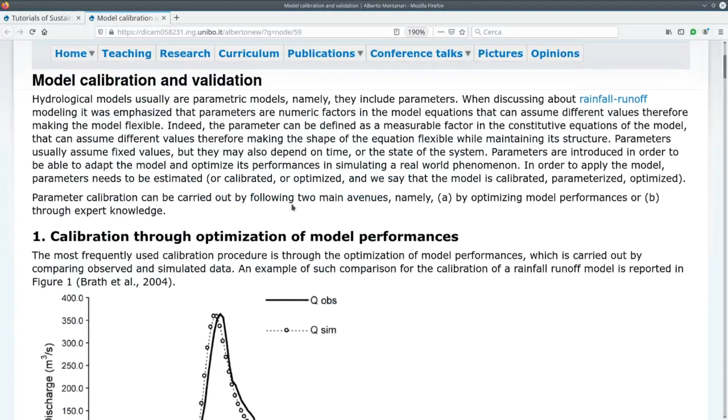This is the page of our course, and we are at model calibration and validation. I want to go back here because we already discussed model calibration, but I want to discuss now model validation, which is a different story. Let me pass to the other view, which is larger. Just 1 second. Here it is. Okay, good. So, as I said, we talked about calibration. Now let's talk about validation.

So what is validation? Validation is a way to check model performances. Calibration is a way to optimize the model performances. Validation is a way to check them. Because calibration is of course a very nice way of making the model able to simulate what we observed. On the other hand, calibration has a downside. The downside is that it's a kind of model training, and you train the model against the situation that you used in calibration. So in calibration, you have a given hydrograph, and you train the model to reproduce that hydrograph.

But actually, what you want to use the model for is not the observed situation. You want to use the model for simulating something that you don't know, something that you didn't observe. What you observed is already known, and making the model able to reproduce what is already known is not our target. Our target is to make the model able to reproduce something that we don't know. So, and this is a challenging question, is the model able, after calibration, to reproduce what we call an out of sample situation, an out of calibration sample situation? This is a challenging question.

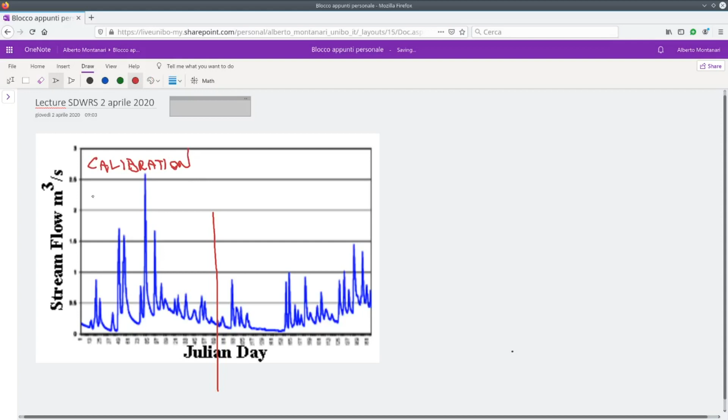So what you see here is an hydrograph, and you could use this hydrograph taken from Wikipedia to calibrate your model. But another possibility is to split the hydrograph into parts. For instance, you can split here, and then you could use this part here for calibration. So you have to forgive my writing, I have to learn. So this could be the set of data that you use in calibration. And then you could use this second set of data for validation.

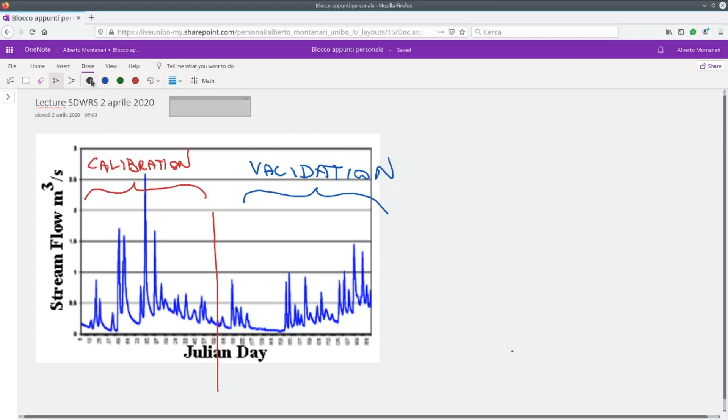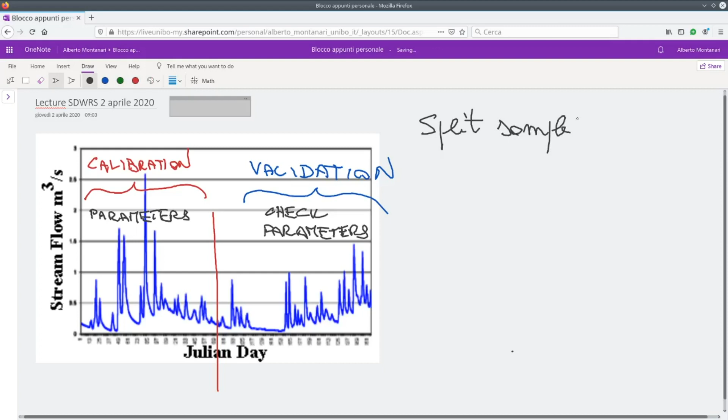Which means that you estimate the parameters here. You get the parameters from here. And then in the second part, you check the parameters. Okay? This is the idea. This is called precisely, in technical terms, split sample validation. This is the split sample validation.

There are some questions here. The first question is, if I use only half of the data to calibrate, the parameters are not calibrated by using the full set of data. So I get a higher uncertainty in the parameters. You may remember that I said that uncertainty in parameters decreases for increasing sample size. The sample is our data set, and the sample size is the number of data. So for increasing sample size, we have uncertainty which is decreasing in the parameters.

And therefore, if I use for calibration a reduced set of data, my uncertainty in the parameters increases. This is true, but we can accept it for the sake of validation. So what we can do is, let's start with half of the data to calibrate the parameters. This is also nice because calibration takes longer if you increase the sample size of the calibration data. So if you reduce the sample size because you split the data, then it's also nice. And then you get a parameter set. Let's assume that this is not the final one, it's temporary, just for the sake of validation.

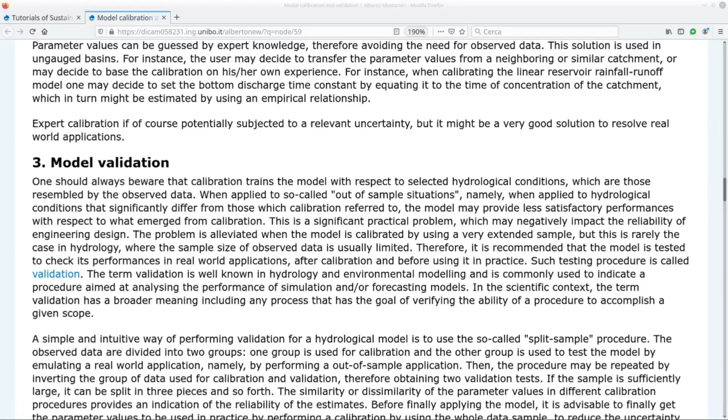I'm not going into the details. This is in a way a question that I may ask at the exam, and you have also the description here. If we go to the web page, I think there is a link here. You see in the bottom. Let me select it. There is a link to a Wikipedia page. And if you open it, you know, this is cross-validation.

It's not called Jackknife here, or maybe it is somewhere. Let me check if the term is somewhere. Not necessarily. Or actually, they make a difference here between cross-validation and Jackknife, because they use the term Jackknife for parameter estimation, not for validation. So, you know, the terminology in different disciplines is somehow different.

What we mean in hydrology with the Jackknife, usually it's the validation, not really the parameter estimation. Even if, you know, they are very similar, because each time that you validate, at each step, you also calibrate. So it's not very different, but the terminology is a little bit different in different disciplines.

But anyway, here you have an example. It says one round of cross-validation involves partitioning a sample of data into complementary subsets, performing the analysis on one subset, called the training set, and validating the analysis on the other subset, called the validation set or testing set. To reduce variability, in most methods, multiple rounds of cross-validation are performed using different partitions, and the validation results are combined, for instance averaged, over the rounds to give an estimate of the model's predictive performance. This is precisely what I meant to say.

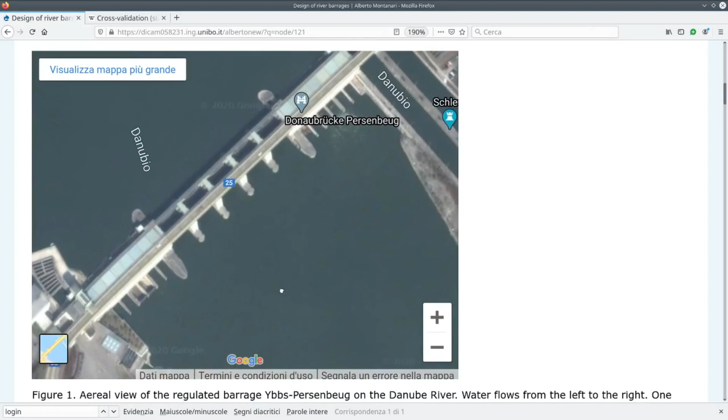We will talk specifically about fixed barrages, unregulated ones in specific, because these are the simpler ones, the ones that a young professional engineer is most frequently asked to design. Here there is a figure which I think I already discussed with you. This is a Google map, and therefore you can enlarge it. It's a barrage on the Danube, conceived for keeping the Danube available for navigation. I already discussed this with you, so I don't want to dedicate more time.

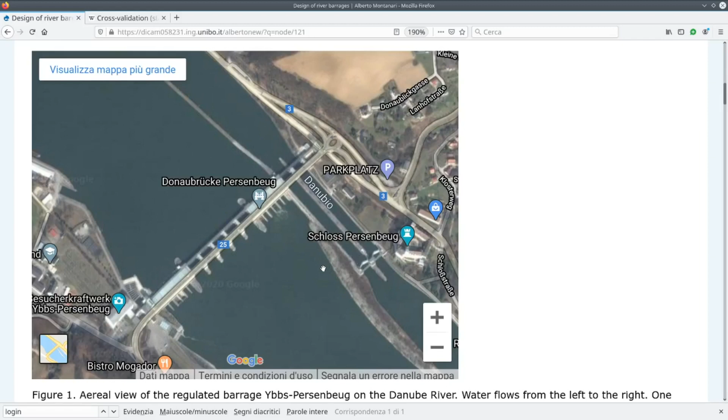I just want to say one thing that I didn't say: it's this purpose of navigating a river that leads to the construction of barrages. Most of the long rivers in Europe, the Rhine River, the Danube, and also the Seine River, are equipped with river barrages in order to make sure that navigation is possible. And in order to pass through them, there are navigation locks. You can see here the navigation lock on the left side of the river. The navigation lock allows boats to get in and out.

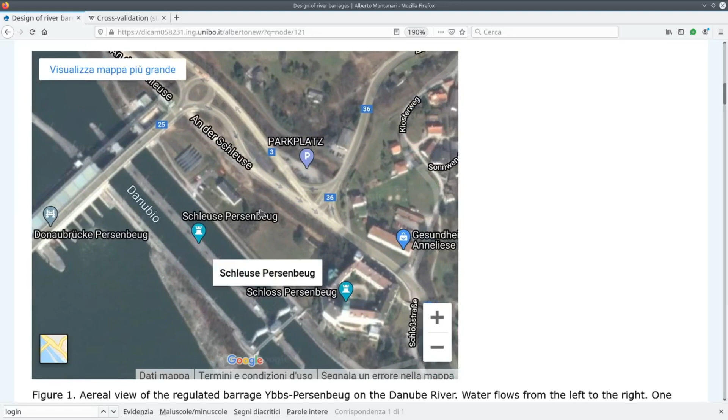Let me see if there is a link. No, I don't think I have a link here of how navigation locks work, but there is a nice figure on Wikipedia. Let me see if I can find it. Just give me one second. I can't find it now. I have it linked in another page, I have to link it here also. Okay, let me just show it to you after the break.

So as I said, most of the European rivers are equipped with barrages in order to ensure navigation. The problem is that these barrages are a concern for environmental impact because they break the river from an ecologic point of view. There is a break between the ecologic system, living organisms in practice, upstream and downstream. And also there is a slowdown of the river flow. The velocity is decreased because you increase the storage in the river, which implies a reduction of the oxygen content of the water, and this causes a decrease of water quality. Again, it's a matter of concern.

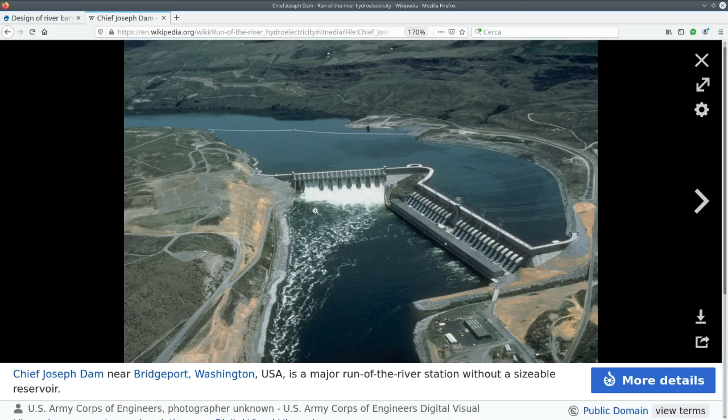And this is an interesting link which you may read. And there is a figure here, for instance. This is a run-of-the-river hydropower plant, which is installed over a dam, but it's the run-of-the-river plant. They are placed in the part of the dam where water naturally flows during the whole year. And they also use the water that is flowing from upstream to downstream, so the water is retained and released just downstream. They use this water flow also to produce hydropower.

Usually hydropower is produced by releasing water much downstream, because the amount of hydropower that you produce, as you may know, is directly proportional to what is called the head of the hydropower plant, or hydraulic head. It's the difference in elevation between the water level upstream and the water level where water is released. So they tend to release water much downstream in order to increase the head. But in some cases, we can also produce hydropower when the water is released immediately downstream. And in this case, we talk of run-of-the-river hydropower plant.

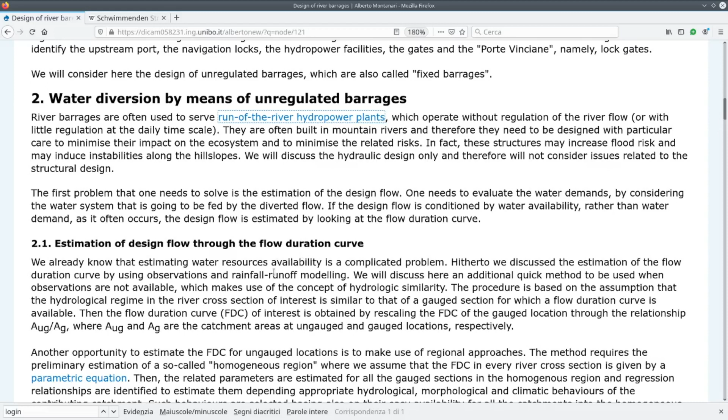And there are other uses for barrages and reservoirs, for instance, flood protection. And even in this case, we need to check whether the uses are conflicting. Okay, so we know how to use the flow duration curve to estimate the design flow of these barrages, because this is our first step. We have to estimate the design flow. And the design flow, we know how it's estimated. It's a cost-benefit analysis, basically. Very often the design flow is close to the Q60, the flow with duration of 60 days. And we already discussed these indexes, so we don't discuss this anymore.

Okay, and now we discuss instead the structure of the unregulated river barrage. Before I start describing these parts of the structure, let me refer to this sketch. This is a typical sketch, and I want to copy it and bring it to the graphic blackboard.

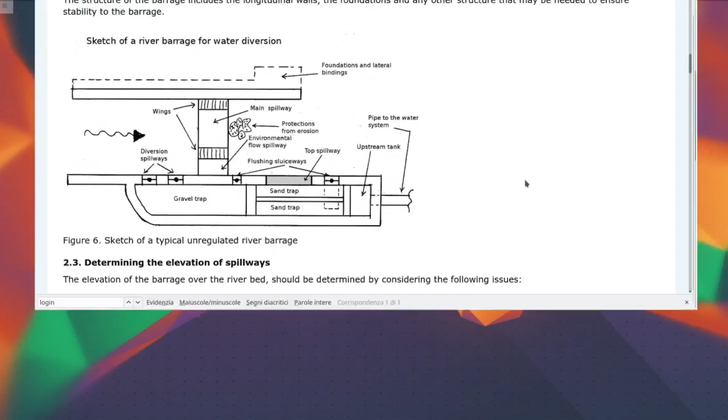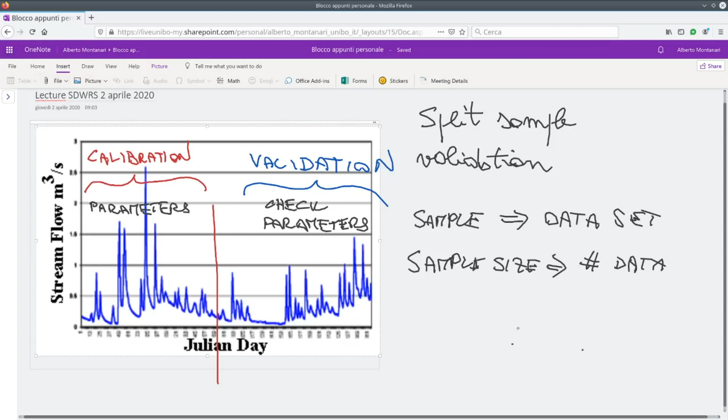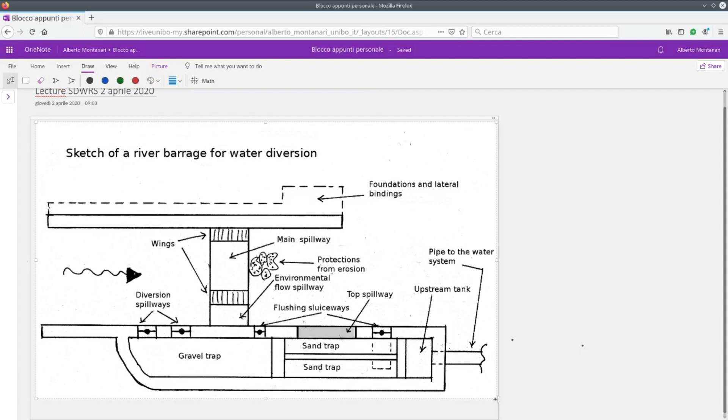Just 1 second. Okay, here it is. Let me paste it here. Let me see if I can. Give me 1 second, because I still need to. Let's give some time to copy. Perfect, it's copied. Now I just have to delete this. Give me some time. Okay, and then just this. Good. So this is our figure taken from the website. Let me expand it a little bit. Good. This is what I wanted. Perfect. Okay, this is our figure.

This is a scheme that is taken from a famous book that was published around 1970 by Giuseppe Evangelisti. He was a famous professional engineer and professor at the University of Bologna. He was an expert in designing dams, hydropower plants, and river barrages. So I took this sketch from one of his books. It is a typical sketch. It's not the only scheme that we can use.

This is a barrage that is developed in the longitudinal direction; there are also barrages that are more expanded in the transversal direction. This barrage scheme is typically used when you don't have much room on the banks of the river. And this is the typical situation in the mountains. When you build a barrage in a mountain river, usually the hill slopes, the banks, are very steep, and therefore you cannot get much room there. For this reason, you need to elongate the structure in the longitudinal direction. So this is a typical structure that you could use in mountains.

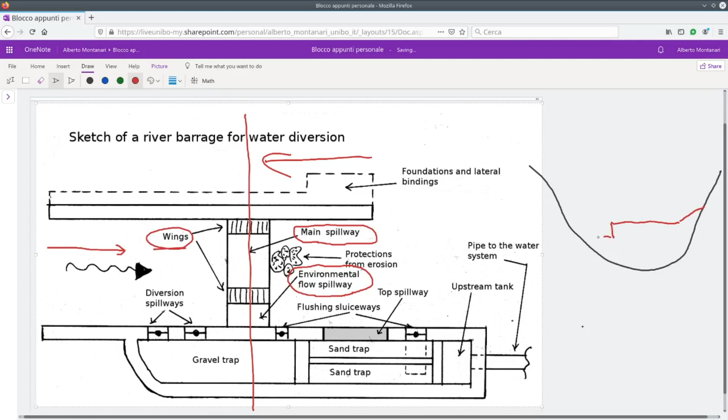And what you see, let's look on the right, is that you have a shape of the cross river section that may be like that. And then you build your spillway. It's not easy. So there is a first part, the wings. You see the wings are here. So you have a wing here, and then there is the main spillway, and then here you have the environmental flow spillway, and then again the wings.

And of course, when you get a water level upstream that is like here, you don't have any flow through the main spillway, but you have some flow through the environmental flow spillway. And then on the side, there will be the diversion spillway, which will be located more or less at this level. This is the diversion spillway, which is here. So, as I said, the elevation of the environmental flow spillway is the lowest one.

And a big question, of course, is what is the difference in elevation, delta H, between, let me get another color, this difference in elevation here, between the environmental flow spillway, the diversion spillway, and the main spillway. There must be a difference in elevation, so there is a difference here, delta H. This is called, in my webpage, I think, delta H1.

And then there is another difference in elevation, which is the difference in elevation between the diversion spillway and the main spillway, delta H2. So a technical question which we will discuss soon is what is the amount of delta H1 and delta H2. Okay, good. Now, given that I hope we understood that the environmental flow spillway is at the lower level, let's discuss what are the wings.

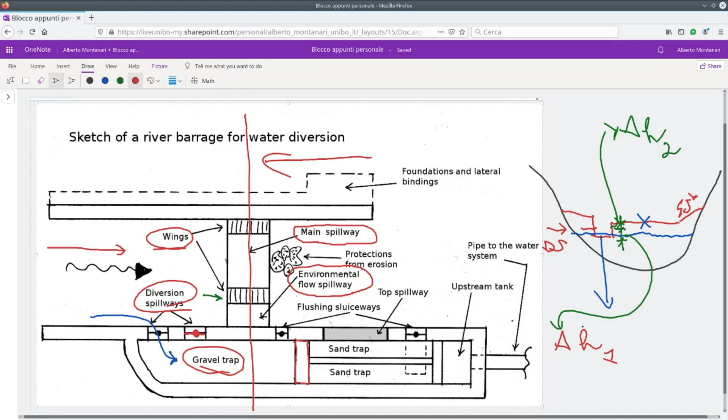Soon after the diversion, you have a gravel trap. The purpose of the gravel trap is to trap the gravel, okay? And therefore here you have this kind of step. It's a bottom step, okay? It separates the gravel trap from the subsequent pool, which is the sand trap. The purpose of the gravel trap is, of course, to trap the gravel, so material of larger size. The purpose of the sand trap is to block the tiny material.

Okay. Why do we want to remove gravel and sand from water? The reason is obvious. When you bring water downstream, usually you have mechanical parts. Either they can be turbines, or they can be pumps. It depends on the use of the water. So you cannot tolerate solid material in the water above a certain size. Usually, depending on the mechanical parts that you have downstream, you have a limiting condition.

Like the turbine usually can allow solid material up to the size of 0.3 or 0.8 millimeters. And then you have to make sure that the material of larger size is trapped and removed, okay? And it's more efficient if you remove by class sizes. So first the gravel and then the sand.

Okay, and then the gravel trap must be cleaned. And in order to clean it, you have flushing sluiceways to allow water, when you open them, to flow back to the river. And if the flush is with high velocity, then it helps in removing the gravel and bringing the gravel back to the river. So periodically, once in a while, we need to go there, and you don't deliver water downstream, but you use the water that you withdrew in order to flush these pools.

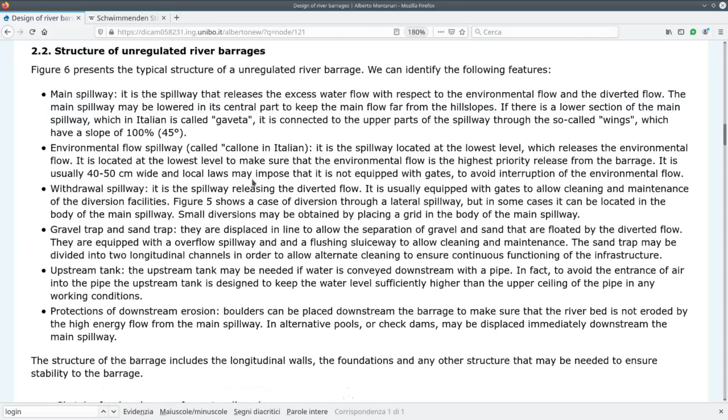Okay. Let me see. Okay, how many are we? Okay, so as I said, let me check the web page. I want to see whether I forgot something. Yes, something I forgot. Okay, good.

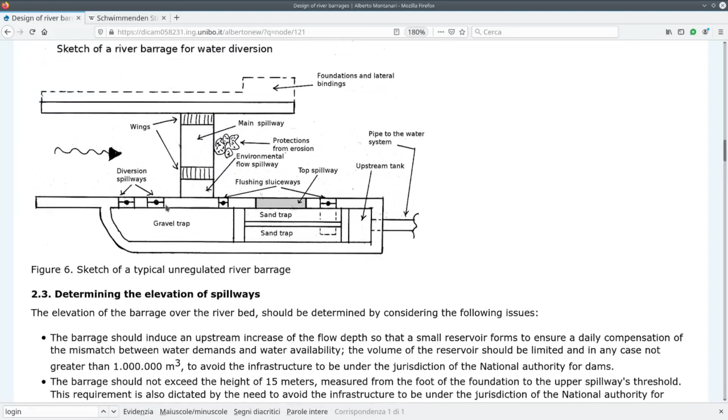Okay, let me go back to the blackboard. Here we are. Okay, so I forgot just to say one thing. It's quite trivial, but I forgot to talk about these protections from erosion that we place downstream. There are several ways for protecting downstream from erosion. We need to protect downstream from the impact of the flowing water.

Usually water falls from the spillways, and therefore there is the possibility that we get kind of holes there, erosion. And also, given that the sediment transport is trapped by the barrage, downstream there is the risk of getting erosion. If you give me 1 minute, I just wanted to show you one picture because it is impressive to see to what extent we can get erosion downstream.

Let me open up my file manager. I wanted to check if I can find some pictures that I took during a trip with the students. Let me see. It's not here. No. Maybe it's here. No, they are not here. I need to go back in time with my pictures. Otherwise, I show you next time. But I still have some hopes. Okay, I found them. Good. Let me show you these pictures.

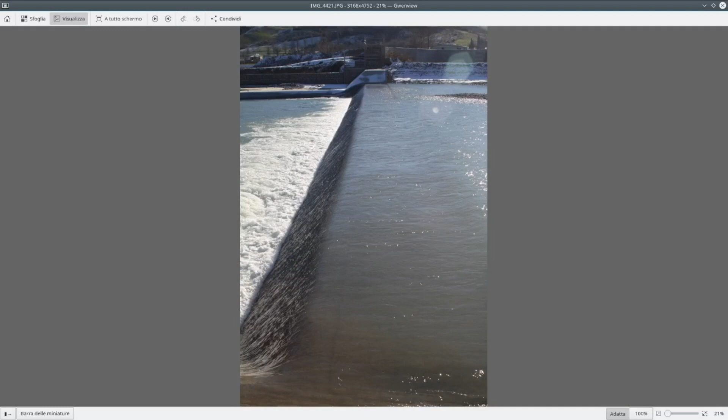Okay, this is the river. This is a part of the reservoir where they built these new infrastructures. I'm just going through the pictures. And here you see downstream. What you see in the upper part of the picture is the main barrage.

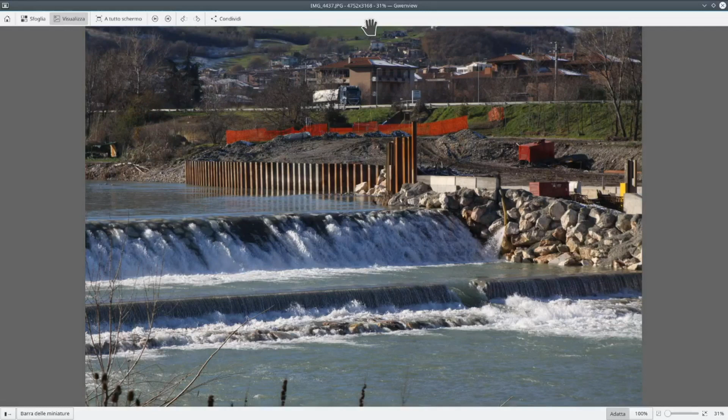I think I can close it.

Okay, good. Now let's talk about elevation again, elevation of the spillway. As I said, let's refer to the environmental flow spillway, which is the lowest one. So how can we determine its elevation? First of all, we need to make a survey of the undisturbed riverbed, so we have a clear knowledge of the shape of the river where we want to build the barrage, upstream and downstream. For a convenient extension, we need to get the longitudinal profile of the river and the cross river sections.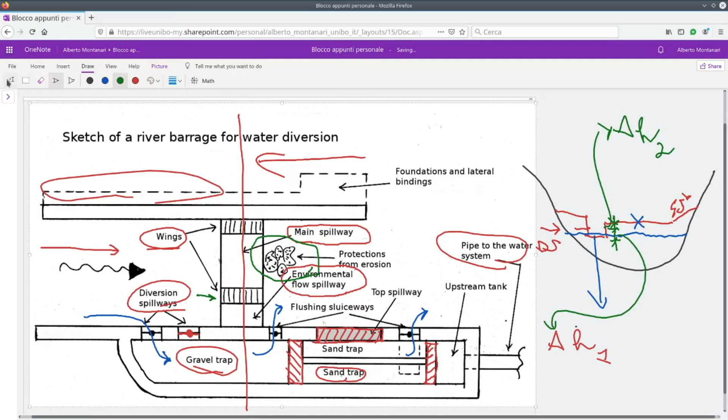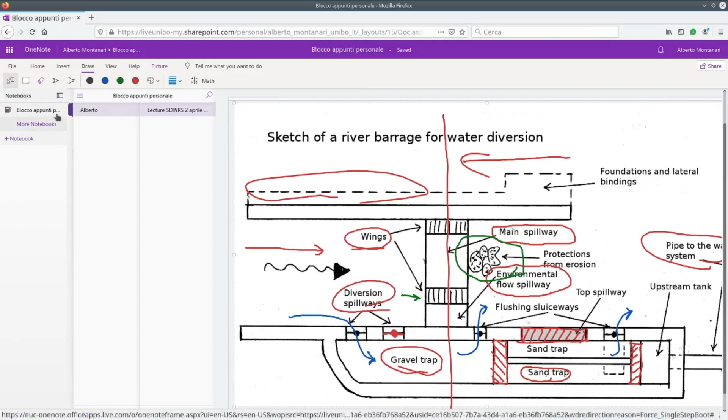So let me create a new page, or let me shift this, just one second. Okay. Okay, good. Now, one second.

Good. Okay, let me try to draw here again a cross section of our barrage. So this is a hypothetical river cross section, and let's draw our barrage here. So let's suppose that it's done in this way. I need to learn how to draw straight lines, so you have to be patient with me. Then we have the wings, and we have the main spillway here. Main spillway, and then here we have the other wing, and then the environmental flow spillway, something like that, and then the wings again here. Okay, good.

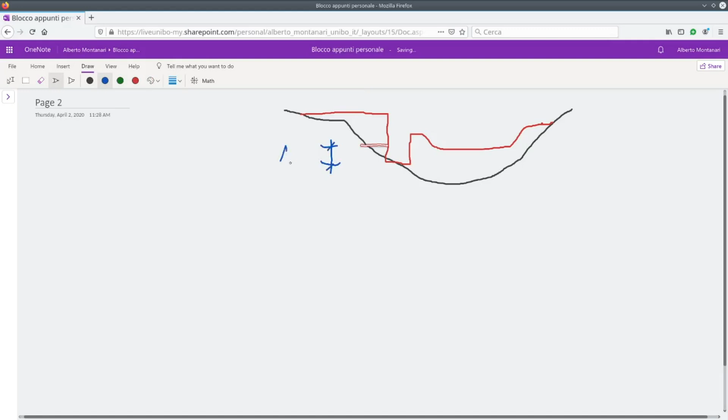So let's suppose that it is something like this, and then there is a difference in elevation here, let's call it delta H1. And then there is somewhere here the water diversion spillway. Sorry, delta H1 is not this, I am just building the figure. Okay, delta H1 is this one. Good, and then let me just, one second.

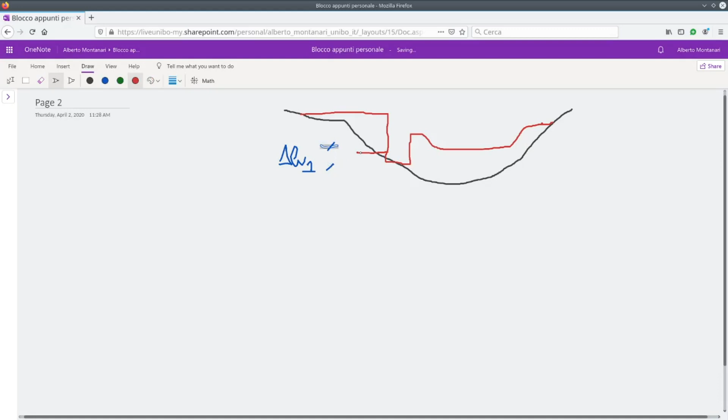Okay, and then delta H1 is here, and then we have delta H2, which is this one. Okay, delta H2. So we need to estimate these two differences in level. It's the difference between the elevation of the environmental flow spillway and the diversion spillway. So this is diversion, and this is environmental flow, env flow.

So we need to estimate this elevation, and we need to estimate the difference in elevation delta H2 between the diversion spillway and the main spillway. Sorry, it took me some time to draw it. And how to estimate then delta H1 and delta H2? This is our question. So how to estimate delta H1? One second. Delta H1. Okay. It's not delta delta, but it's delta H. And how to estimate delta H2.

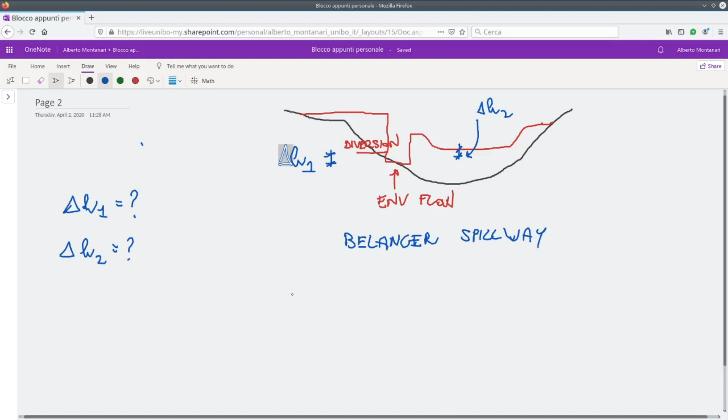Okay. So the key for estimating these differences in elevation is the general formula that gives us the flow through a large width spillway. It's called the Belanger spillway. The formula through a Belanger spillway gives the flow through this spillway.

Keep in mind the Belanger is a large width spillway, and the formula Q is given by a flow coefficient μ, typically equal to 0.385, and then we have the width of the spillway L, which in this case is given by this, if you look in the upper part of the picture. Sorry, I forgot an h before the square root. μLh, I will explain what h is, times the square root of 2gh. So what is h?

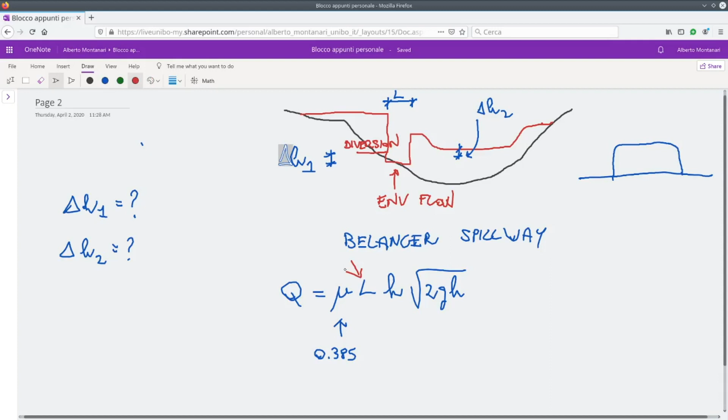Let me draw now a longitudinal sketch of a spillway. A Belanger spillway has a large width, a large length, let's say, because width can be measured in the longitudinal and in the transversal direction. The L in this relationship is measured in the transversal direction. When I talked about the large width of the Belanger spillway, I meant the width in the longitudinal direction, okay?

Perfect. So suppose you have some water coming from upstream. In correspondence of the spillway you have a so-called fall towards downstream. You have a decrease of the water level over the spillway because of the increasing velocity of the flow, and downstream you have the flash of water. What is H? H is the difference in elevation between the spillway and the undisturbed water level upstream.

Okay, so look at this relationship here, the Belanger relationship. This is the key for us to estimate delta H1. You can rewrite it this way: Q is equal to μ L H to the power of 1.5 and 2g to the power of 0.5. Okay?

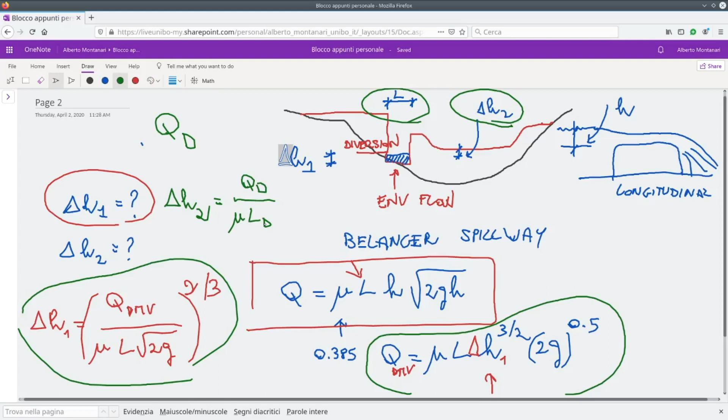Okay, and therefore I am writing here in red my delta H2 will be equal to design flow QD divided by mu LD. LD is the overall width of the diversion spillway. If we have more than one, we sum all the individual widths. And then here I have the square root again of 2g, to the power of 2/3.

Sorry. I need to learn how to use this pen. There are too many buttons on the body of the pen. I have to deactivate them.

Okay, this is our relationship, which I am now marking in yellow. This is our relationship for delta H2. Okay, so what is the sequence of events which I'm trying to describe? Let me write in red. First of all, one, environmental flow. And then second, I have delta H1. This is the level of water over the environmental flow spillway. And then it follows that we have withdrawal or diversion. Let me call it diversion to be coherent. And then three, I have delta H2, and then I have the main spillway, which is activated. This is the sequence of events.

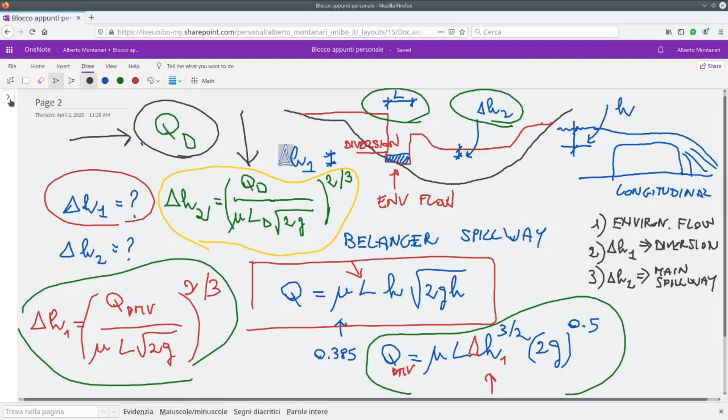It's how we define QD, the diverted flow. It's the design flow of your withdrawal. It's defined through the flow duration curve. Okay, now let me get another one. Sorry. Okay, perfect. Give me 1 second. Okay, let me try to do it this way, and I hope it's clearer.

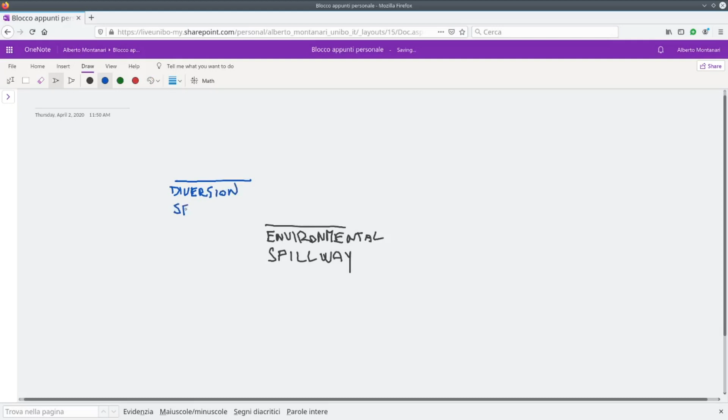So we have the elevation of the environmental flow spillway. Good. And then we have here, let me put it with another color, the diversion spillway. And then we have here in red the main spillway.

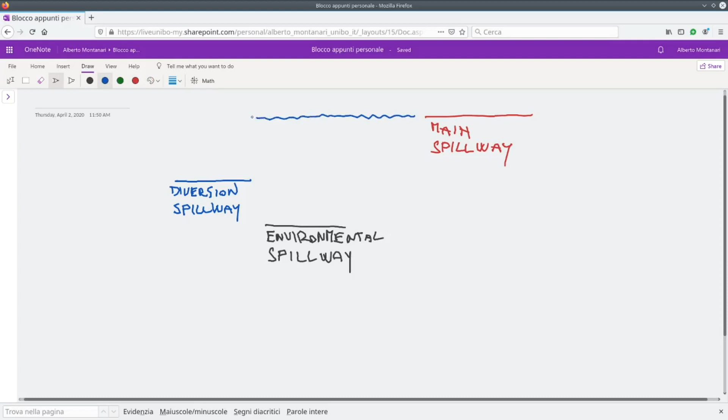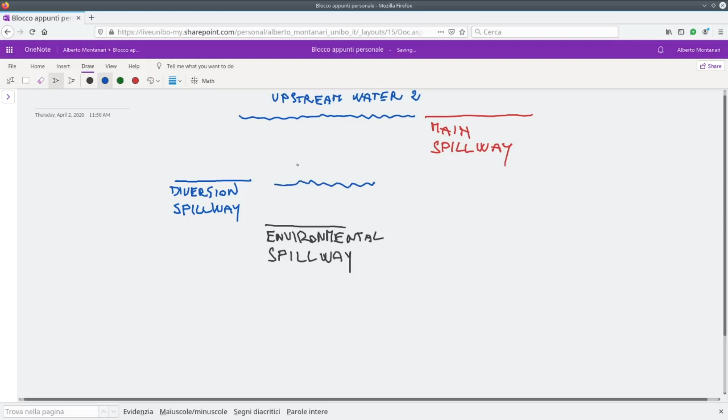Okay. Now let's suppose that you get a water level here which is precisely at the elevation of the main spillway. This is upstream water 2. And let's suppose that we have another water level now which is here, which is upstream water 1. It is just a different water level, upstream water 1.

Now what are these two water levels? Upstream water 1 is the level of activation of the diversion, and upstream water 2 is the level of activation of the main spillway. Now let me call this elevation delta H1, and the flow that is coming out from here is QDMV. Now let me call this difference in elevation here delta H2, and the flow that is coming out from here is my QD. Is the sketch clear?

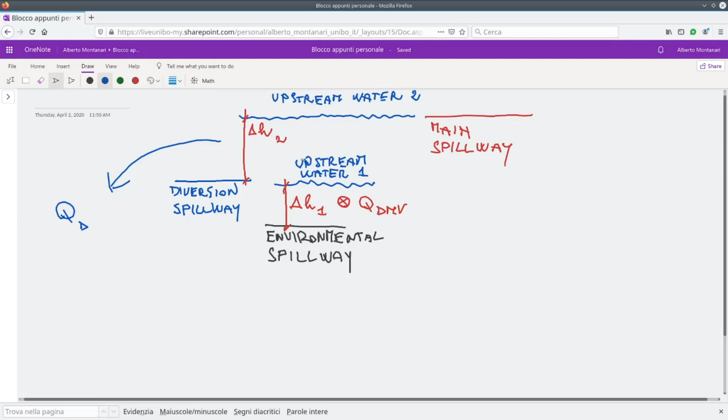First let's focus on the situation when the water level is upstream water 1. In this situation we need to make sure that for the elevation delta H1 we get a flow which is equal to QDMV, and the way we get it is: delta H1 is equal to, I rewrite for clarity, QDMV divided by μ L square root of 2g, to the power of 2/3. This is valid for upstream water 1.

So when I have a level corresponding to upstream water 1, I have an elevation of water over the environmental spillway equal to delta H1, and in this situation I have through the environmental spillway a flow QDMV. I hope this is clear. And if not, just stop me.

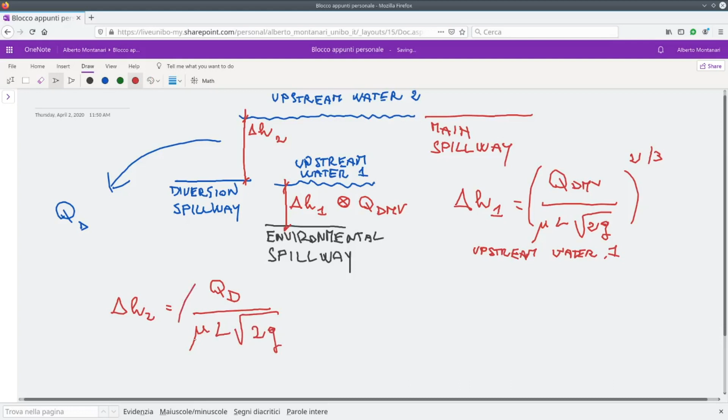Now, let's refer to a different situation. I have a water level which is equivalent to upstream water 2. Let me focus only on the diversion spillway. What happens in the diversion spillway? I have a flow through the diversion spillway equal to QD, the design flow. And what is then the elevation delta H2? Delta H2 is equal to the flow at the numerator, which in this case is QD, my diversion flow. At the denominator, I have again μ L square root of 2g, to the power of 2/3. So with an elevation of delta H2, through the diversion spillway I'm getting QD.

Now, I don't need any more water through the previous spillways. So let me put the main spillway at that elevation. That's it. Is this clear? If it is clear, I have a final consideration to make. I have one question. Yes, please. For delta H2, I don't really understand why it's only QD and not QD plus QDMV. Because while I'm diverting QD, I still must make sure that QDMV goes out, right?

Yes, this is right, but I am focusing only on QD because I am focusing on what happens on the diversion spillway. When I made my explanation, I said, let's focus only on the diversion spillway. Let's forget the environmental flow. For sure, you are right. There is still environmental flow going out. And the reason why I didn't say this is because I have something more to say. But now I want to make sure that you understood what happens over the diversion spillway. Let's suppose that you don't have any problem with upstream flow.

So you can have enough flow from upstream to feed the diversion spillway and the environmental flow spillway. Let's just focus on what happens on the diversion spillway. And I want to make sure that you understand that with an elevation of water over the diversion spillway equal to delta H2, you are getting QD through the diversion spillway. So this is what you need to understand now.